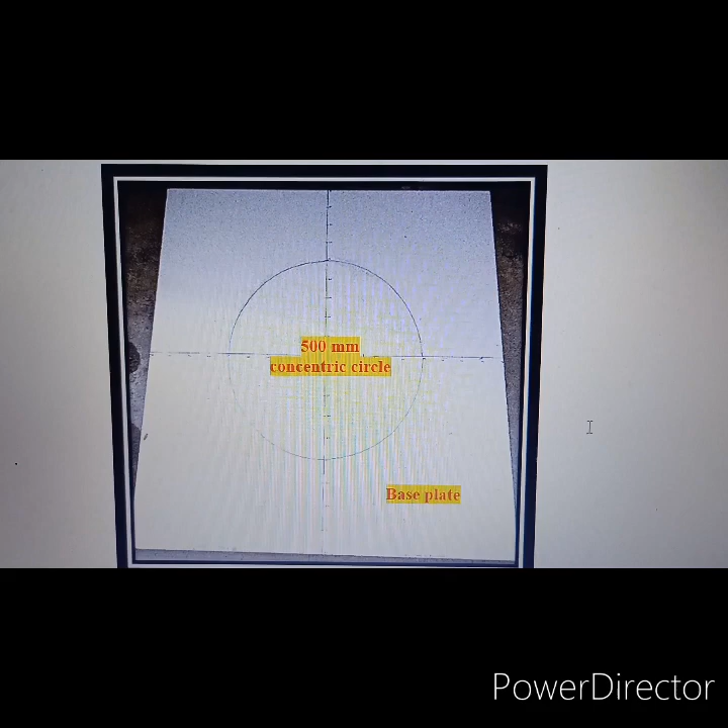This picture shows an example of a typical base plate used for the J-ring test. Before starting the test, a concentric circle of 500 mm diameter from the center of the base plate should be drawn using a temporary marker. This is a must.

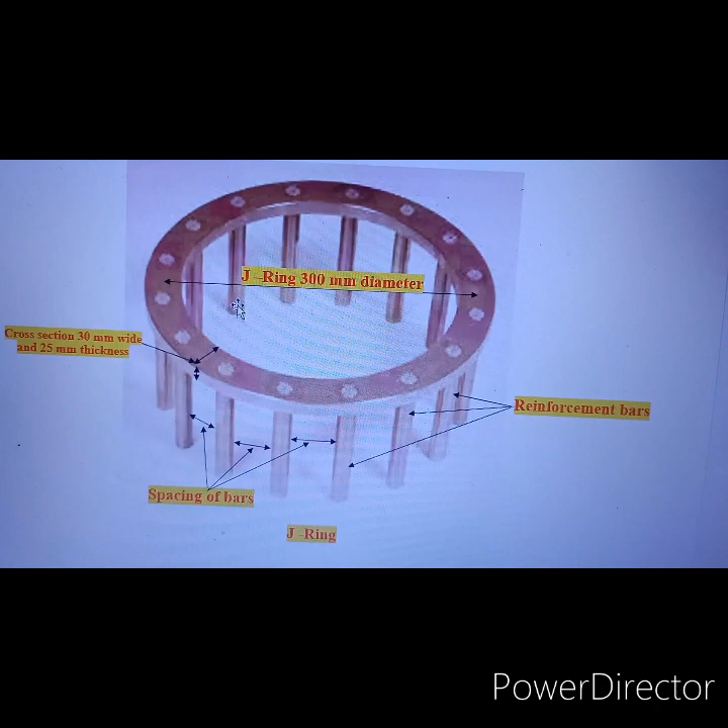This picture shows a typical J-ring apparatus. So the entire setup is called J-ring. This is the top open ring, with a diameter of 300 mm. The cross section of this top ring has a width of 30 mm and thickness of 25 mm.

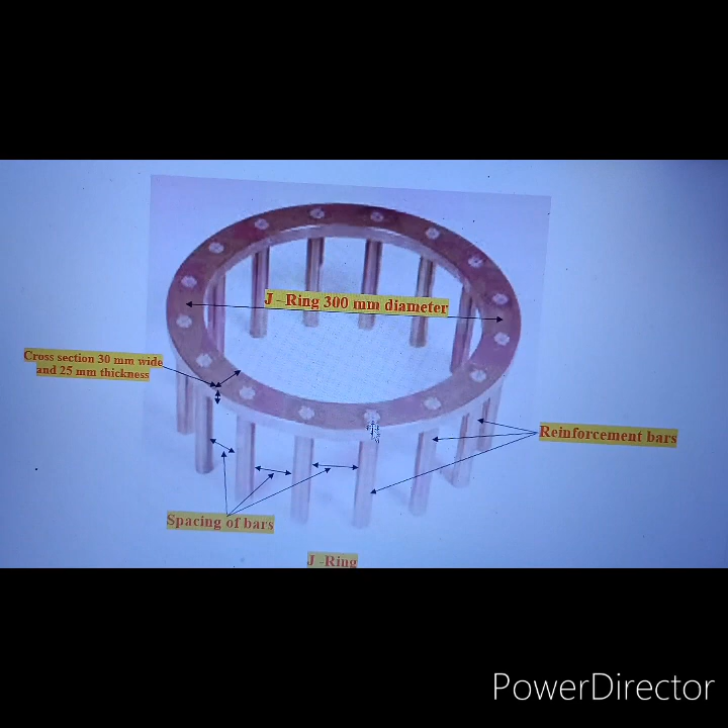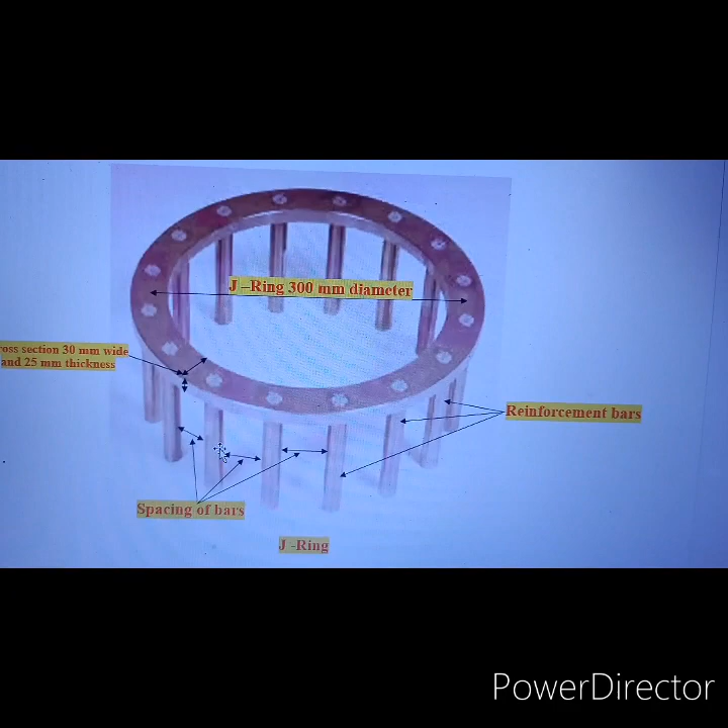There are vertical drilled slots in which you can insert the reinforcement bars. These are the reinforcement bars, normally 10 mm in diameter, but different diameters may also be used depending on site simulation. The height of the reinforcement bar is normally 100 mm, sometimes up to 125 mm, again depending on site simulation. The spacing of these reinforcement bars is 3 times the maximum size of coarse aggregate used.

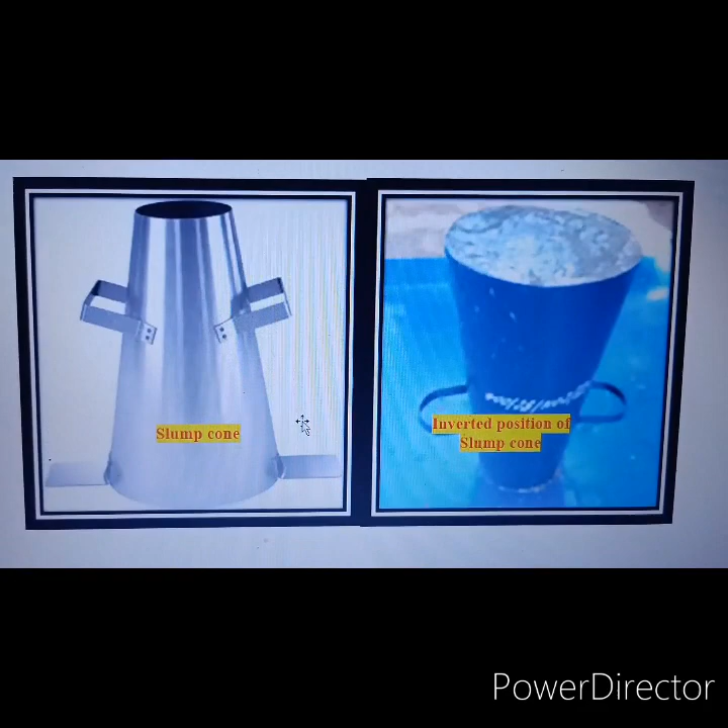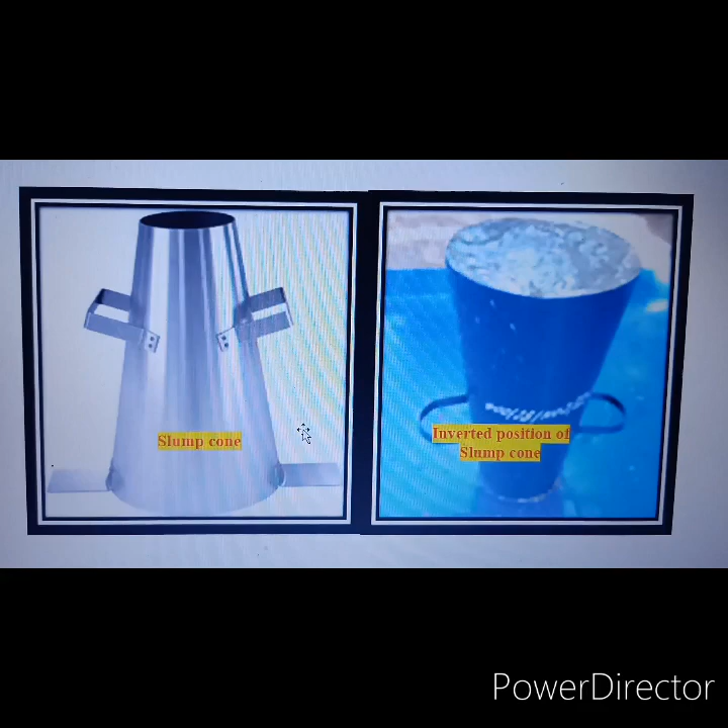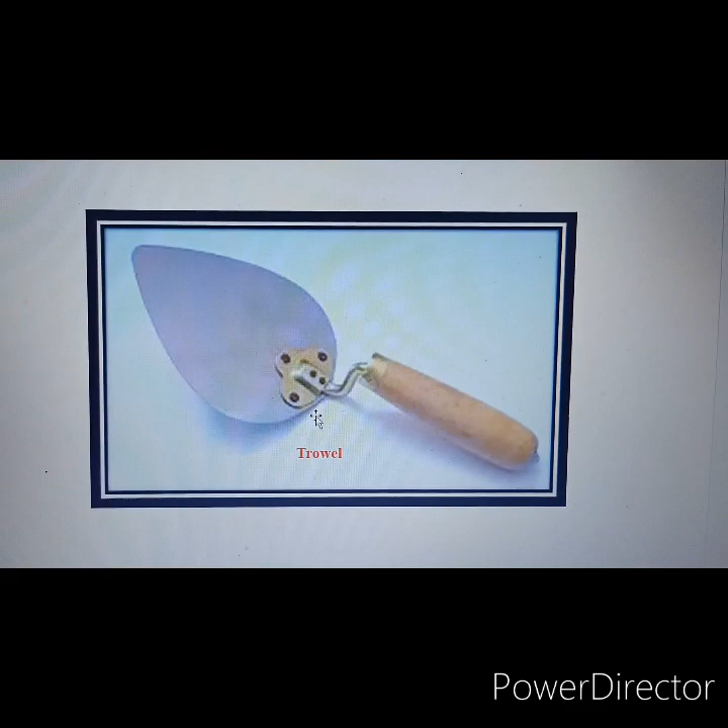The J-ring and the slump cone should be placed exactly at the center of the base plate. The slump cone can be placed in normal upright position, or sometimes inverted - nothing wrong in it. A scoop can be used to take the fresh concrete and fill it into the slump cone. A trowel can be used to strike off the top surface and level the fresh concrete in the slump cone.

To measure the flow diameter and the height of concrete inside the J-ring and outside the J-ring, and the time taken to reach the final position of concrete, a scale and stopwatch can be used.

Now we will see how to perform this J-ring test. The procedure is almost similar to slump flow test, that is, the same procedure followed for slump flow test is followed for J-ring test also. Here, in addition to the slump cone, the J-ring is also placed at the center of the base plate.

A slump cone can be either placed in upright position, that means in normal position, or it can be placed in an inverted manner also.

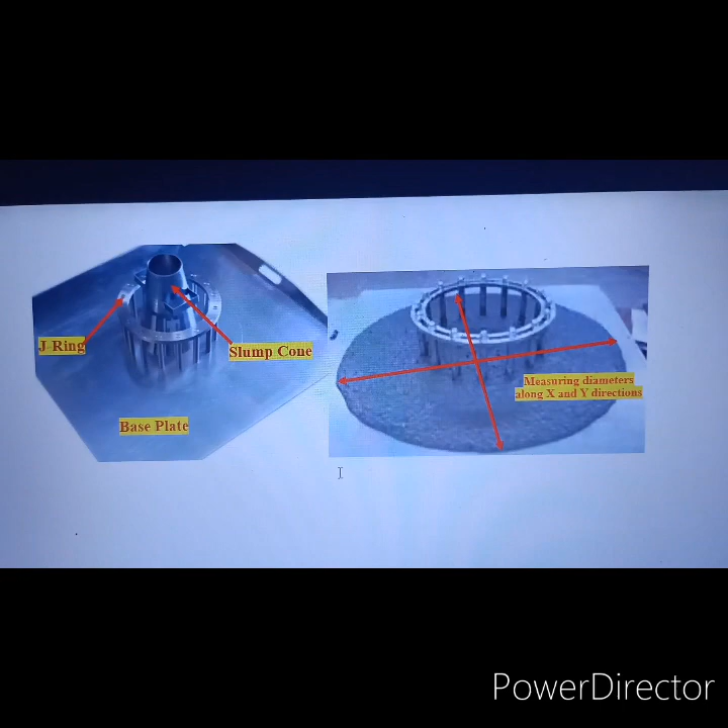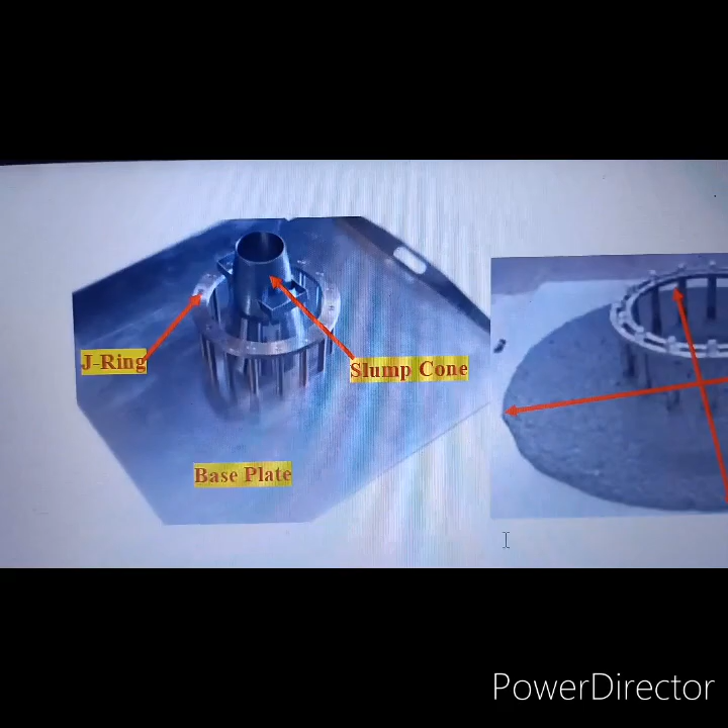This picture shows before and after the test. This picture shows the base plate and the J-ring placed at the center of the base plate. Then a slump cone placed inside the J-ring, at the center of the J-ring as well as the base plate. So this is how the setup should be made before the start of your test for J-ring.

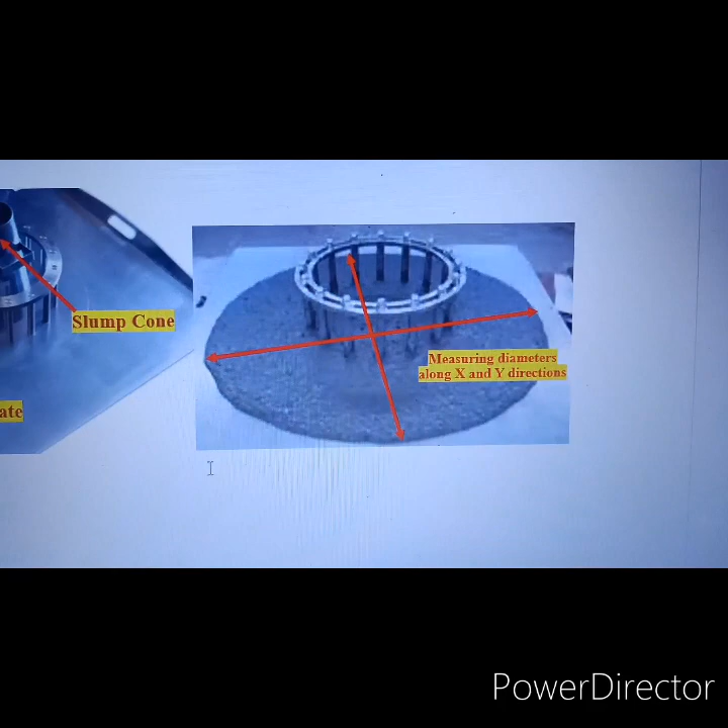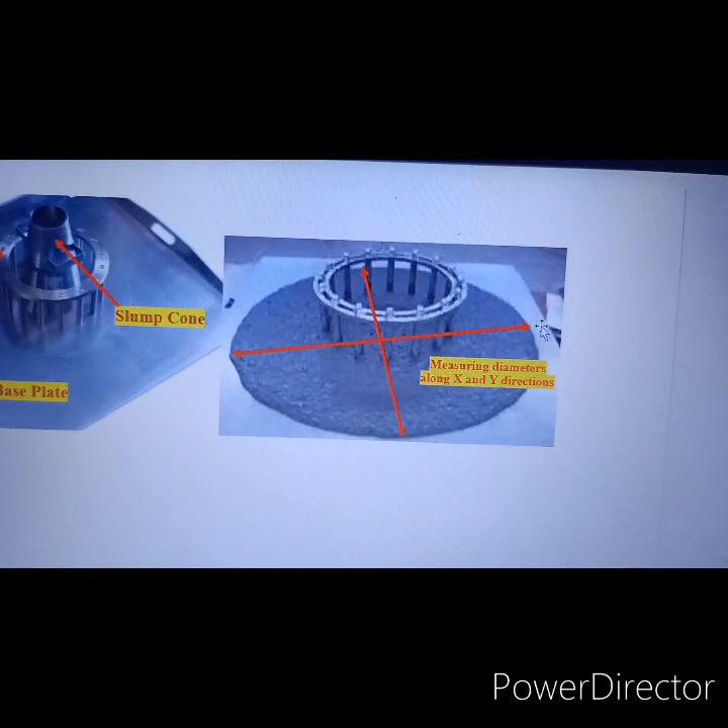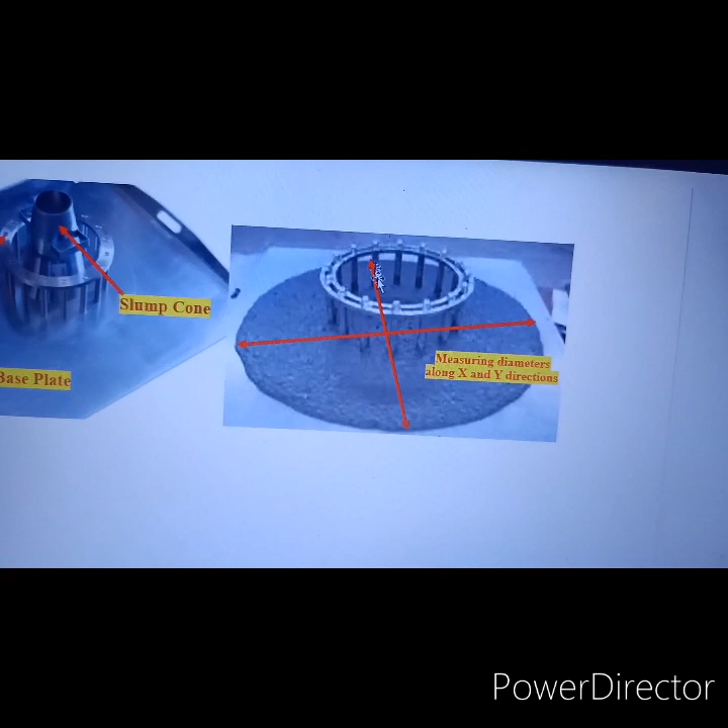So once the test is completed, at the end you have to measure the maximum diameter in one direction, say the x direction, and the other diameter which is perpendicular to x, that is the y direction. Take an average of this diameter as the J-ring flow value.

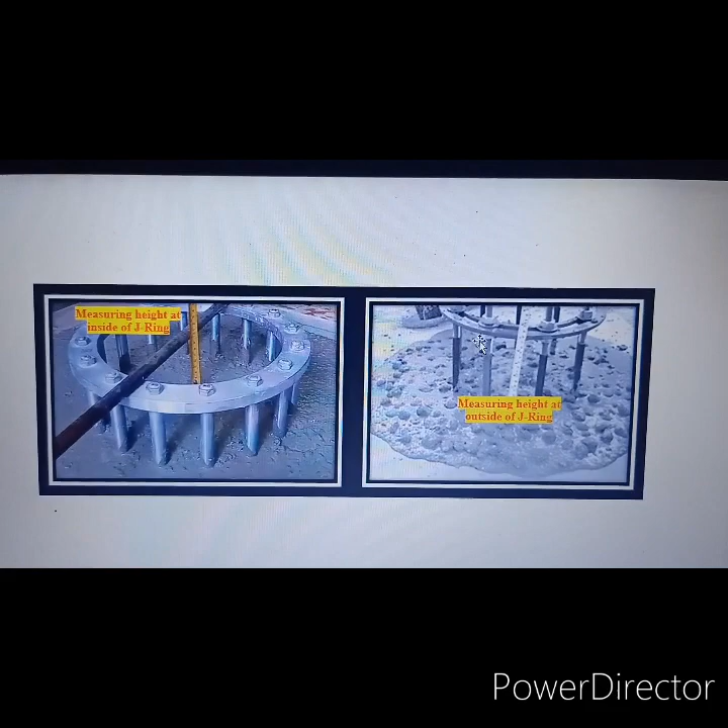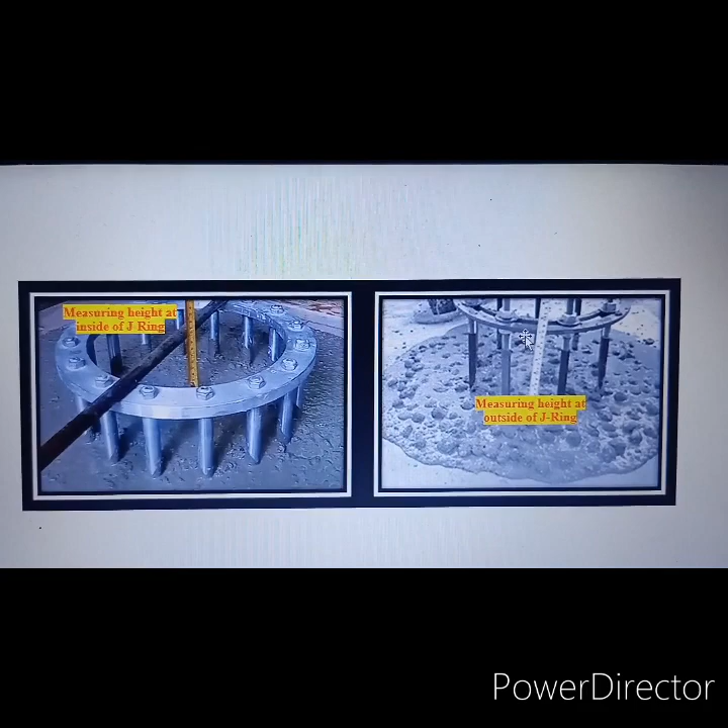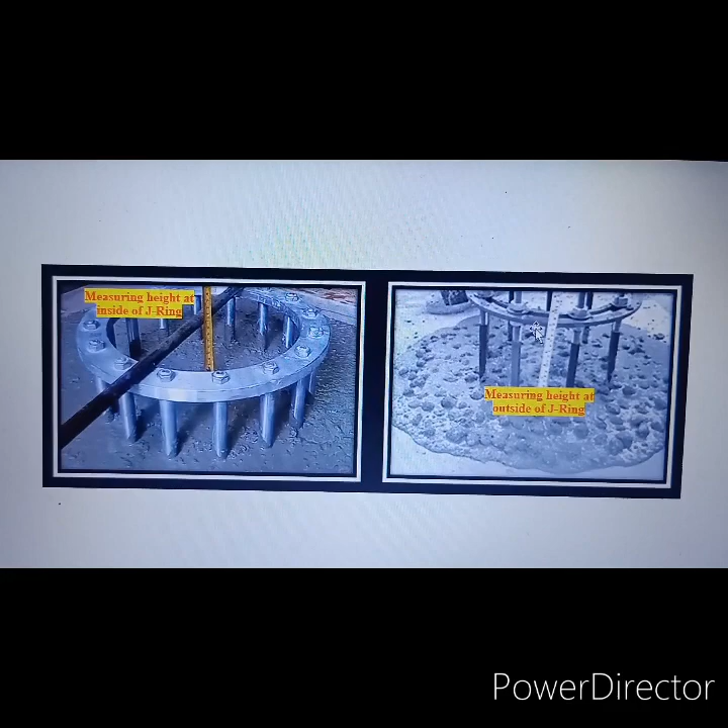Then measure the height of concrete inside the J-ring like this and outside the J-ring like this, at 4 different locations, measuring the height both inside and outside. Take an average of both inside and outside of all 4 locations. The difference of these two values you have to compare for analyzing the results and to state your recommendation about the passing ability of self-compacting concrete, making use of this J-ring test.

Now let's see how to interpret the test results. To analyze the J-ring flow value, we need to have the slump flow value also, that is without J-ring, using only a slump cone. At first, we will find T50J time or T500J time in seconds.

That is, the time taken by the concrete to reach a 50 centimeter or 500 millimeter diameter circle during the J-ring test. Now calculate the J-ring flow value in millimeters, that is, an average of 2 diameters measured in 2 mutually perpendicular directions.

Having the slump flow value, find the difference between the slump flow value and the J-ring flow value. If the difference of value is between 0 and 25 millimeters, then we can say there is no visible blocking because of that concrete. If the difference of value is between 25 millimeters and 50 millimeters, then we can say there is some minimal visible blocking that may happen to that concrete.